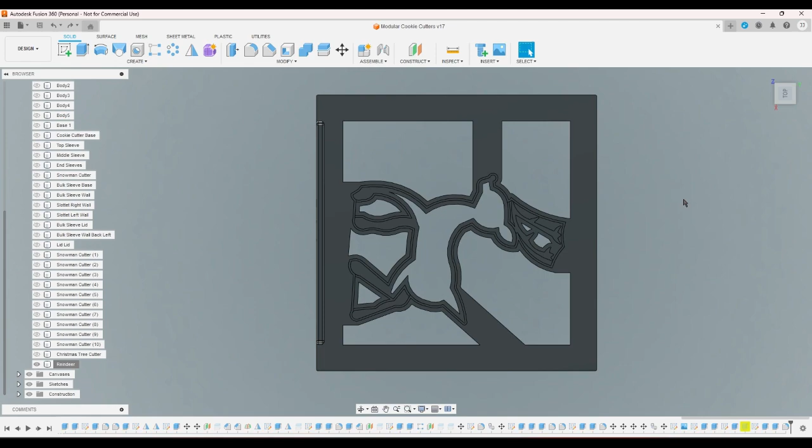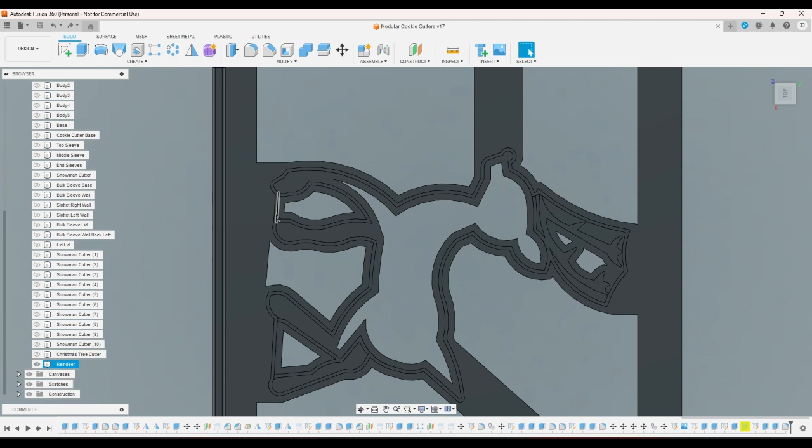Okay, so I showed the reindeer cookie cutter to my sister to make sure she liked it, and she told me to get rid of this right here, she didn't like that. She preferred the shape of the cookie if there were two chunks of legs instead of just one skirt shape. But other than that, it was fine.

So I just quickly made those changes, and now I'm gonna make a Santa cookie cutter. But before that, I'm gonna bring up the cookie cutter base, and I'm gonna do something that should have been done a long time ago.

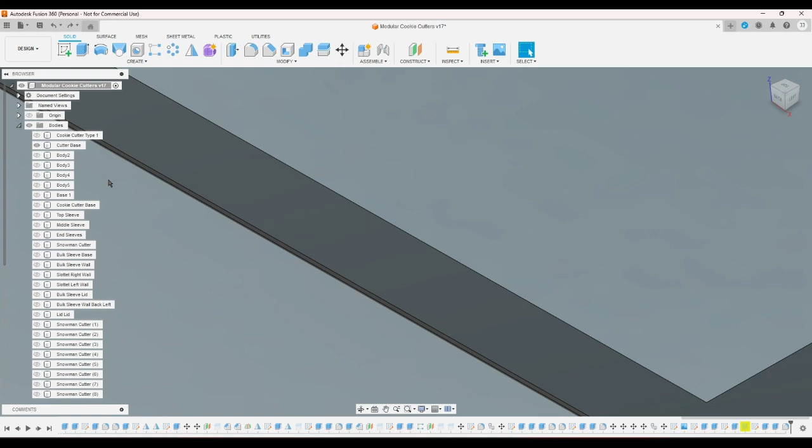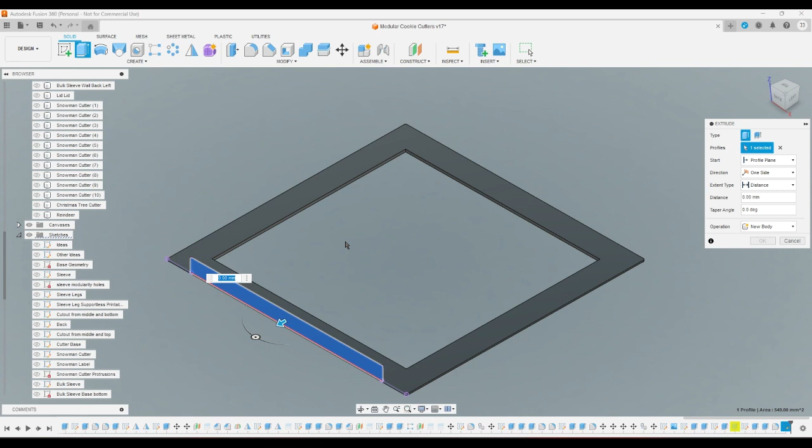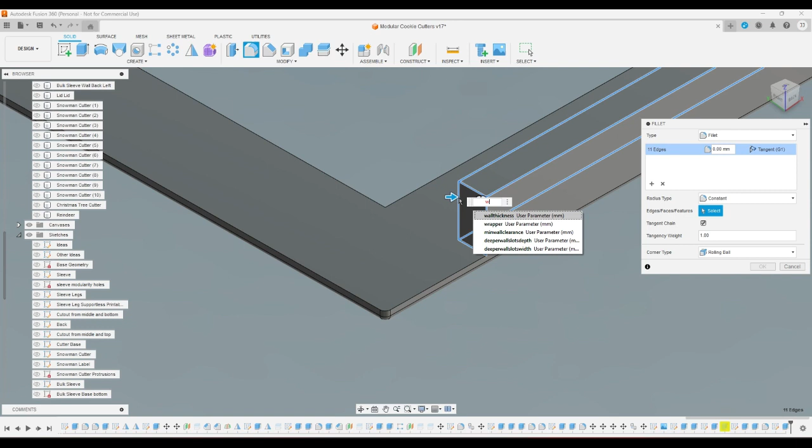Okay, and now I'm gonna bring up the snowman sketches, the snowman label, and I'm gonna project it. And then I'm going to just go ahead, two wall thicknesses, fillet this, and that corner while I'm at it. Alright, there.

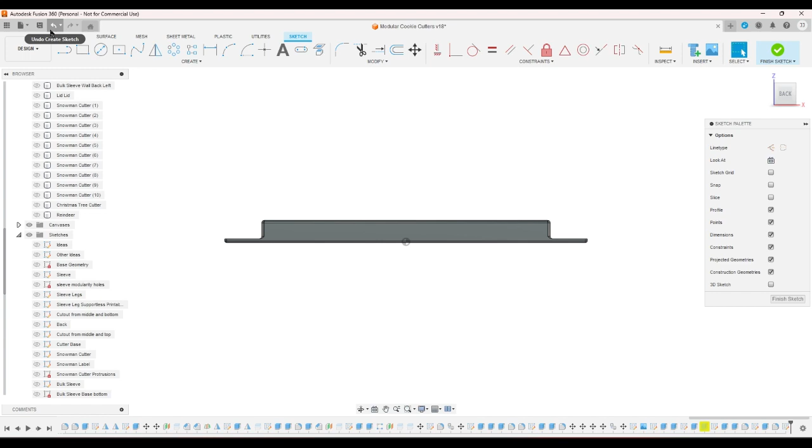Now from now on I can just start a sketch and put the text on it without having to do all that project nonsense from before. Okay.

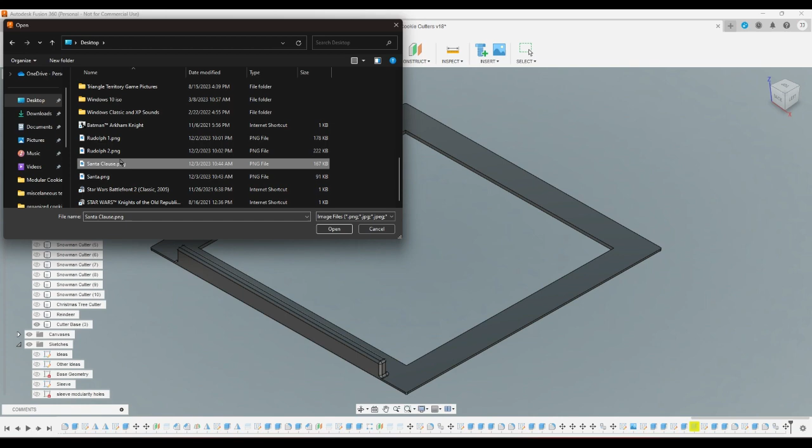So now I'm going to make a copy of this. Get rid of the first one. Bring in a picture. Santa Claus. And it is the Tim Allen Santa Claus because it's very easy to turn into, or it looks very easy to turn into, a cookie cutter. Very easy to trace.

Okay, that's good, I think. What if I rotate this? Can I make it bigger? No, I can't. Alright.

Now I'll start a sketch here and just trace it. About there. Put an arc about there. I don't think I need to do his face, but just in case. I think I'm just gonna do the outline first, and then I'll do details later. Okay.

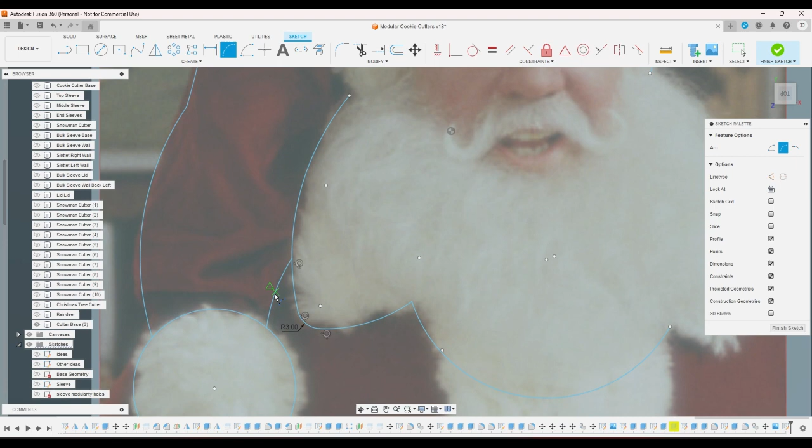I'm gonna have this go, the actual shape of it looks more like it's going this way, but I put it this way just to give it more of a Santa hat shape. So if I make it invisible, that's starting to look like something. This should be a little bit easier than Rudolph was.

Yeah, it looks good. Oh hey, that's not his beard there, that's the collar, isn't it? In fact, that might be his beard there. Huh. And if that were his beard, then that would make more sense to put that there. Yeah, you know what, that might be his collar right there, the collar on his suit.

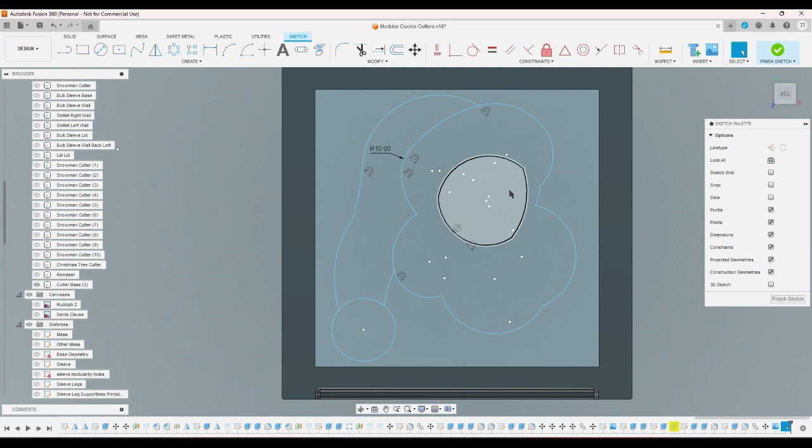It is not easy to... that doesn't look good at all, does it? Because that is what is visible, and that looks like a lady with big hair. It's because the hat and the beard blend in together.

So if I took from here to here, and then looks like the hat goes more or less like that. How's that look? Now it looks like a lady who's wearing a hat.

How would I solve that? I think I need to do a better job at getting the outline of the hat. Okay, now how does that look? It's a better hat.

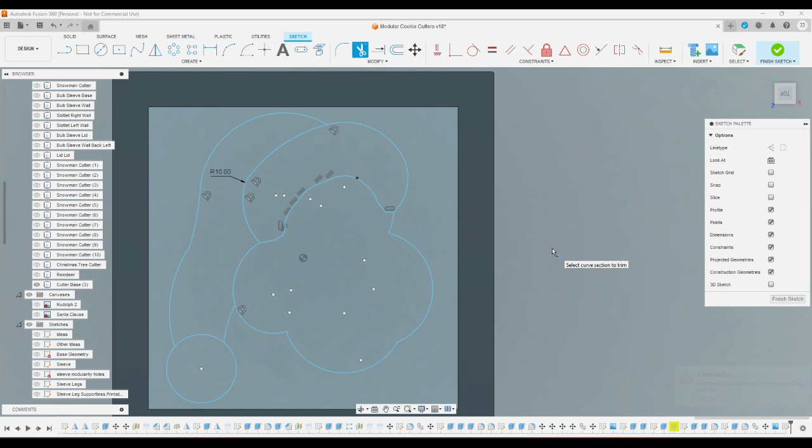Also, I noticed a lot of parallel constraints here. Why is that? I don't know, look, this one's vertical. I think what I need to do is separate the hat from the rest of him. So if I do that, what does that do?

If I extend this to be a full circle and this to be there, and then I have this, and then I shrink the hat, if I just ignore some of this white stuff here, like say I put it maybe here, that's the beard, and then the hat can come in like this.

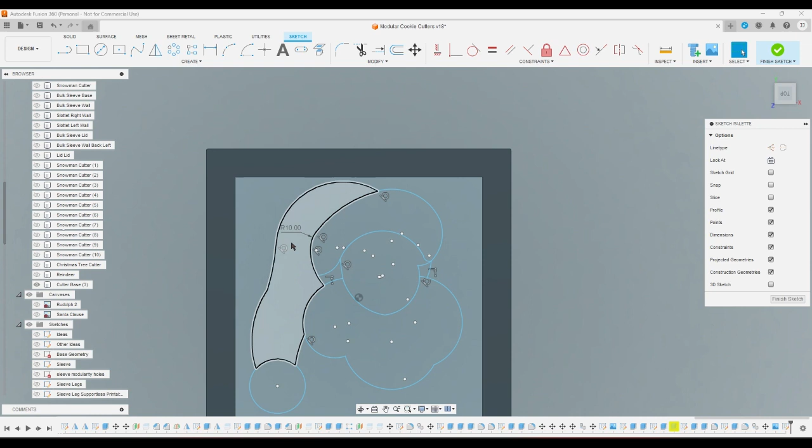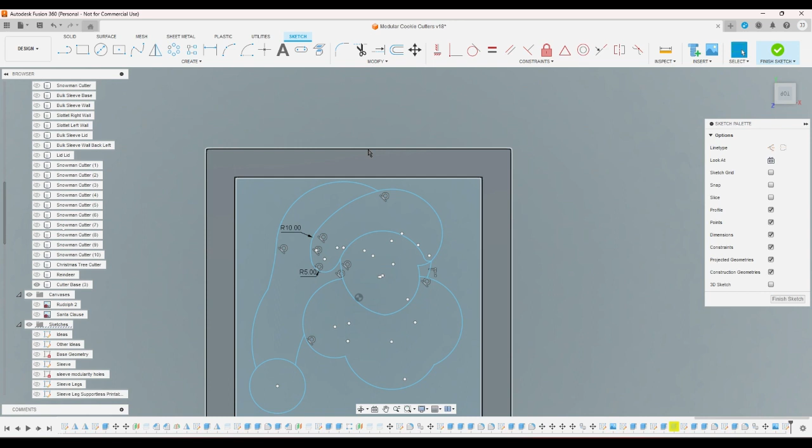Alright, so then that would be the hat. I could trim this. Okay, okay, the hat comes out too far. So whoops, I'm gonna have to do my best to, I don't know, estimate something.

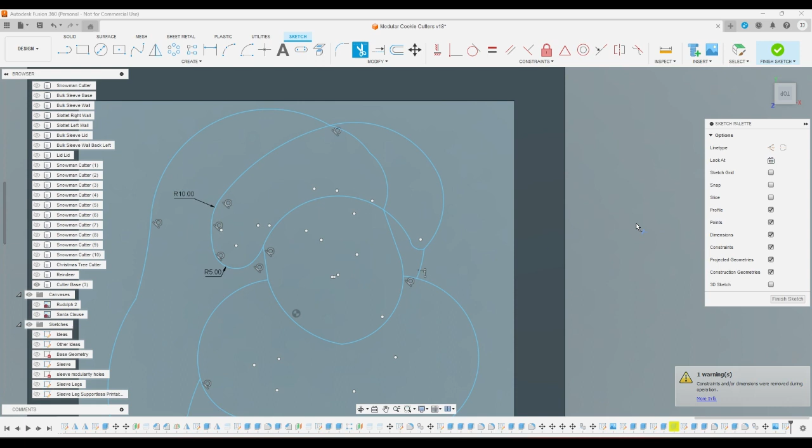Let me just get rid of all of the hat. Okay, that white part of the hat is really tough. Don't include that.

So then if I have a piece here and a piece here, and then I have a piece here that just is a little bit poofy, and then I have this, then another piece that's just a little bit poofy, and this. But now the problem is it's too tall and it looks like a different kind of hat.

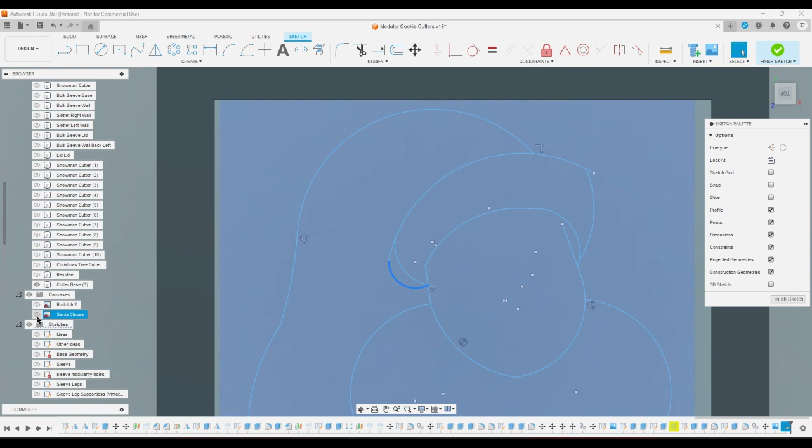So that's the problem - in this picture the hat kind of just goes all the way around his face, but then it ends up making him not look right. So if I did this, follow the hat again, but not all the way, just break off here.

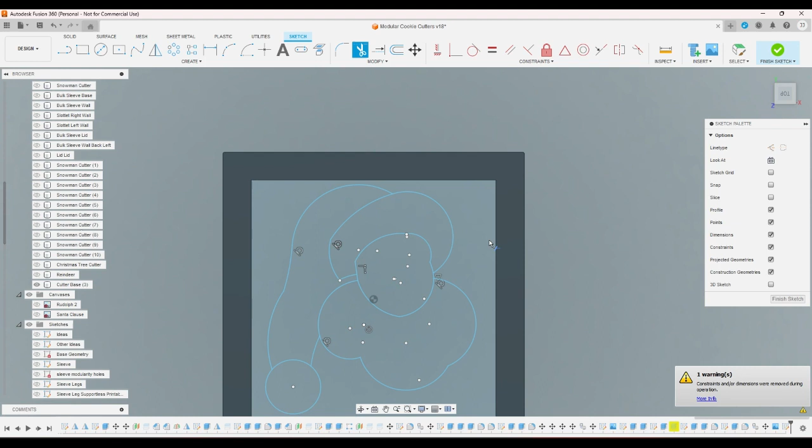Whoops, wrong. Okay, now what does that look like? If I trim this, and bring this in...

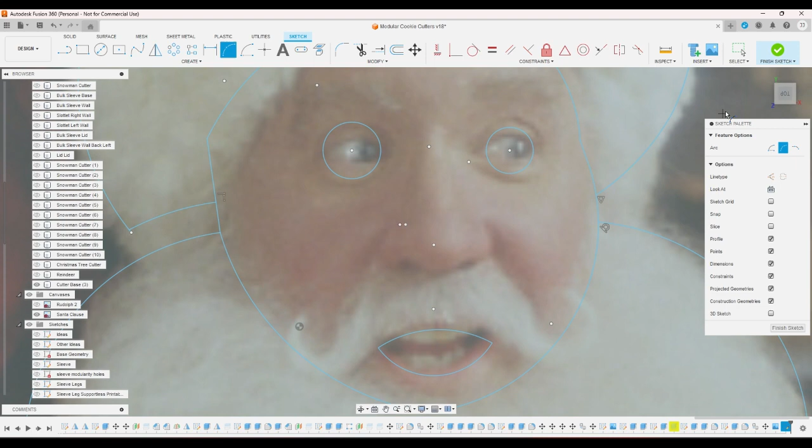I need to have eyes. Let me see something real quick. If I just put two little eyes and a mouth, how's that look?

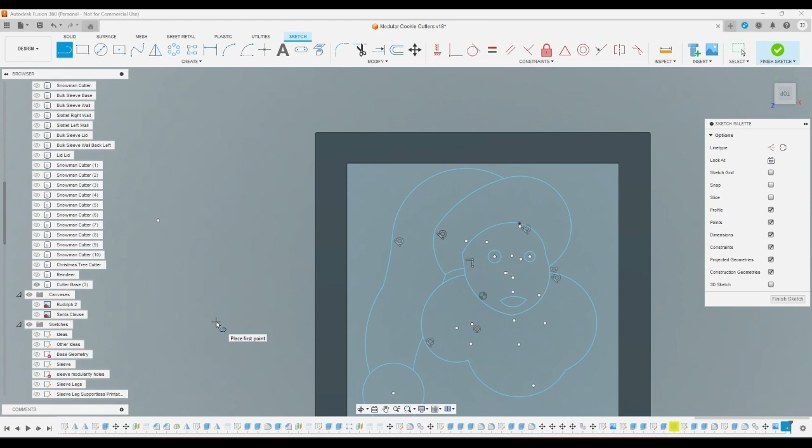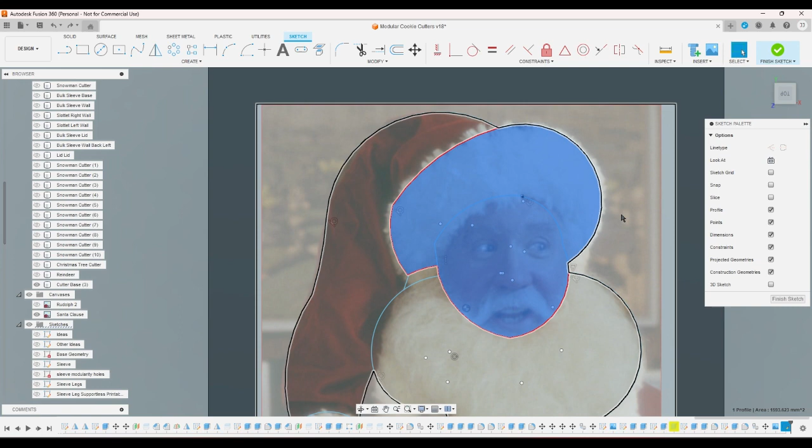It's the face that's ruining it. It's the shape of the face, I think. See, that's better if it's just that.

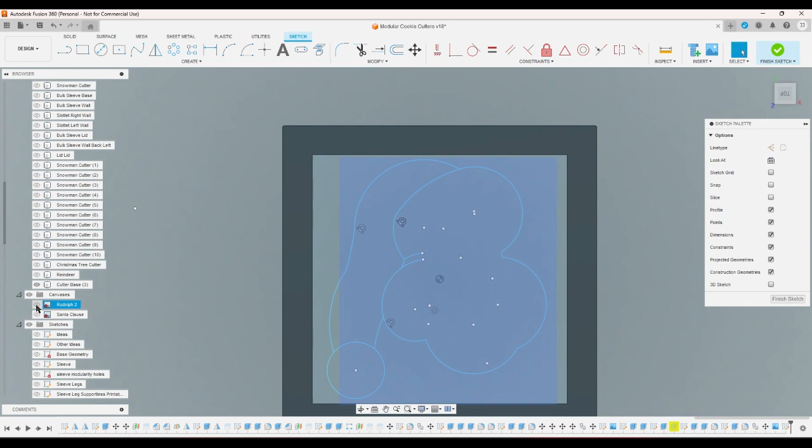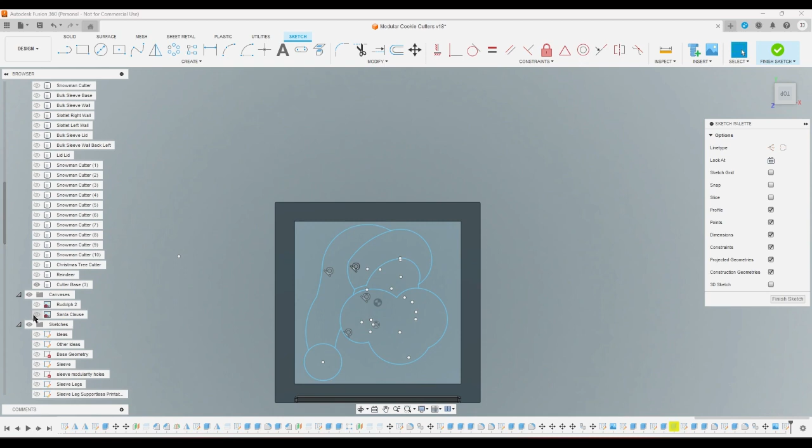Okay, so what if instead of having the beard be the same, the beard is also like poofy? That's better. That looks like a beard now.

And then if I add the mouth through the beard, yeah, that looks like a Santa Claus.

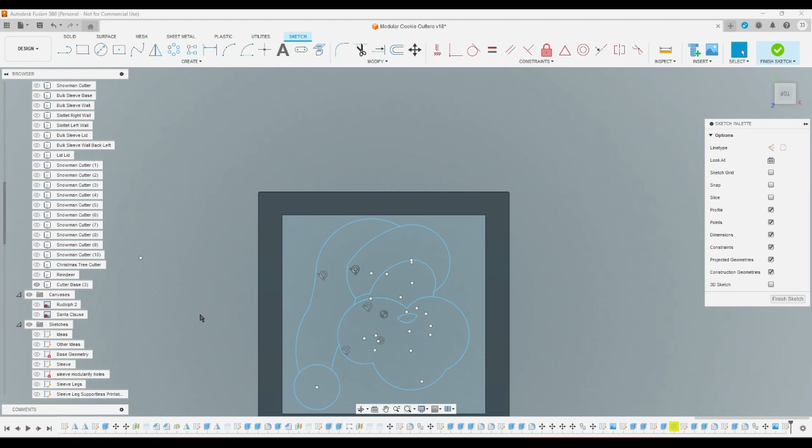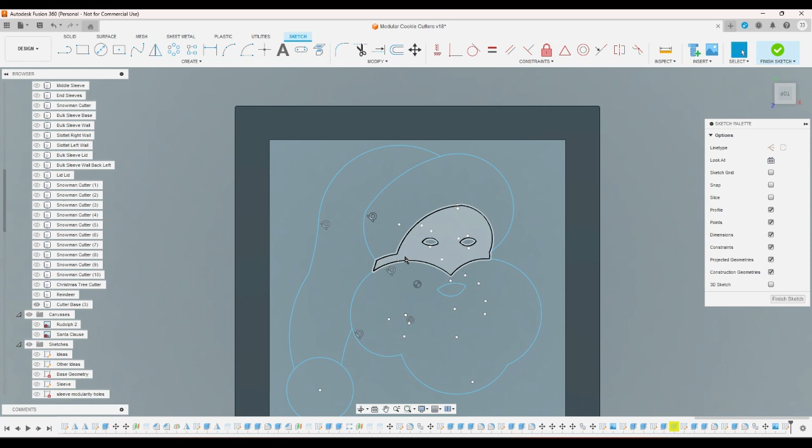Okay, so now I'll add his eyes, because apparently it needs to have eyeballs in order to not look wrong. And then, oh goodness, oh goodness. I'm not good at drawing things, so like...

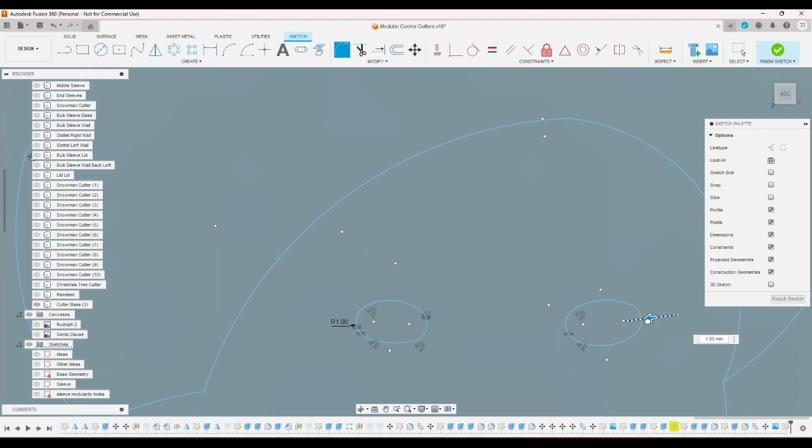I think that'll work, I think that'll work. Okay, this and this.

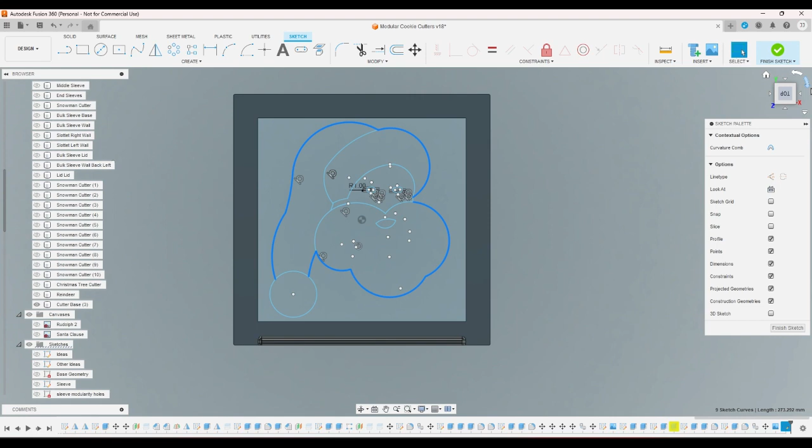Could not offset curves. Okay.

Joel? Yeah? I forgot to buy Fabulosa. Could you run to the store and get Fabulosa for me? I'm gonna clean the walls. Not right now.

Okay, okay. Cutter thickness.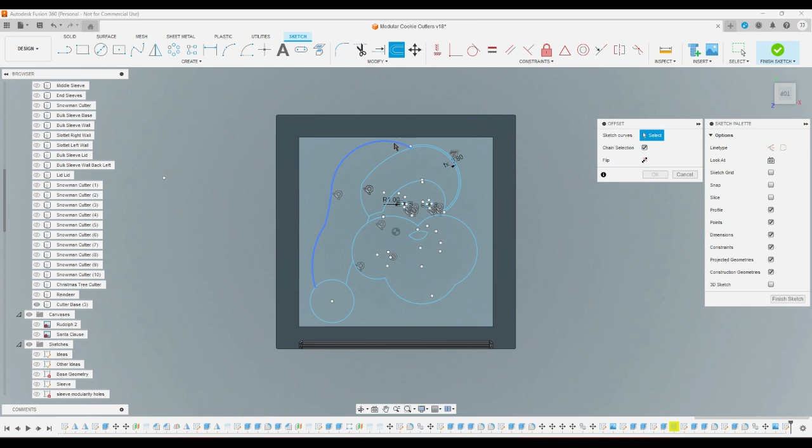Trim these, which is gonna suck because... never mind, okay. Whoops, what?

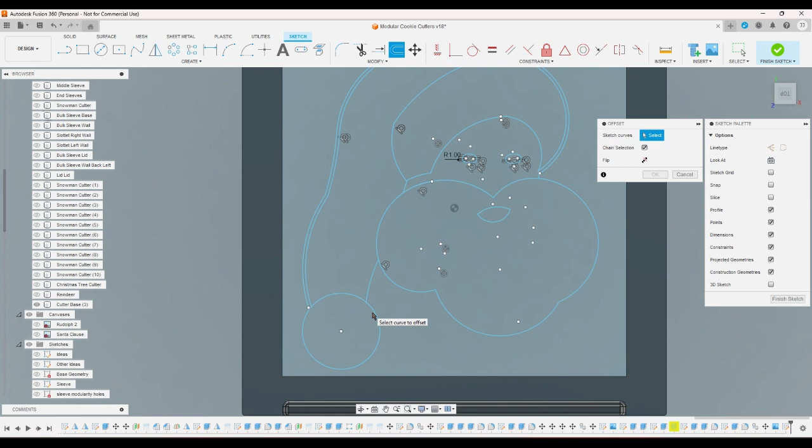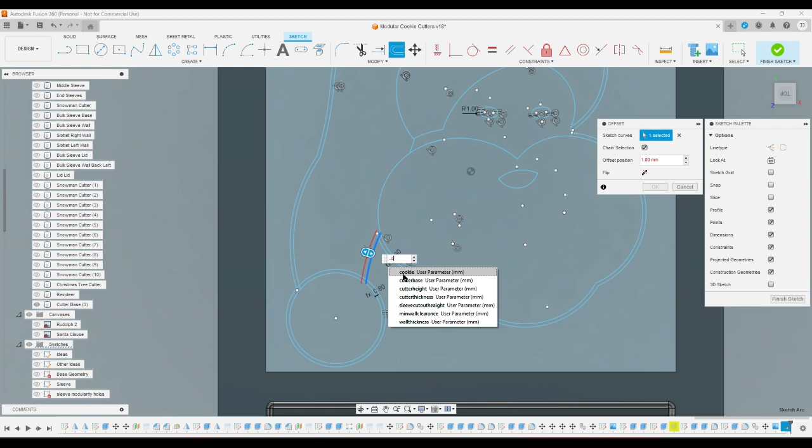Okay, offset this as well. This has to be negative. And then... okay. Now trim here. What? No, trim, not extend.

Alright. Constraints and or dimensions were removed. I understand that.

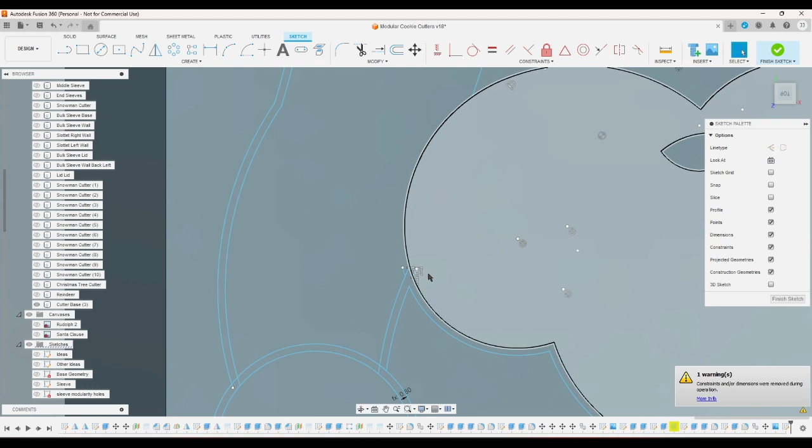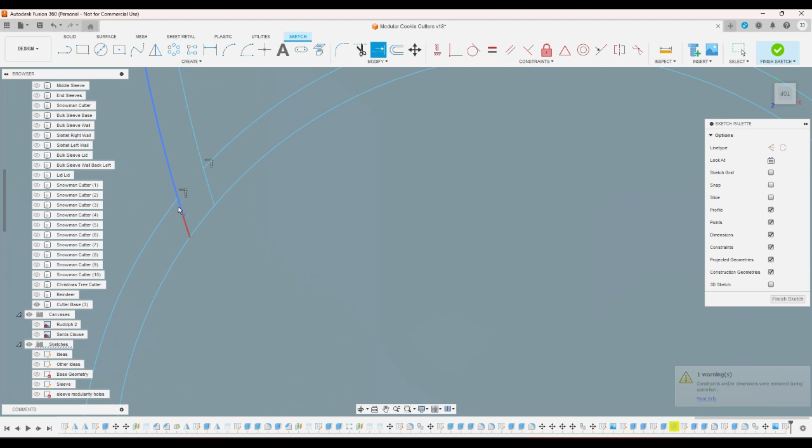Alright, and then if I... okay, and then I guess I might as well also get these two bits. Oops, I keep accidentally clicking on extend. Alright, that's good.

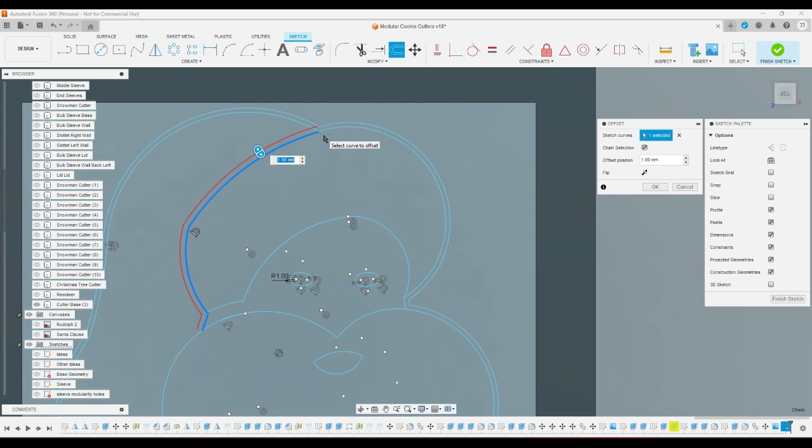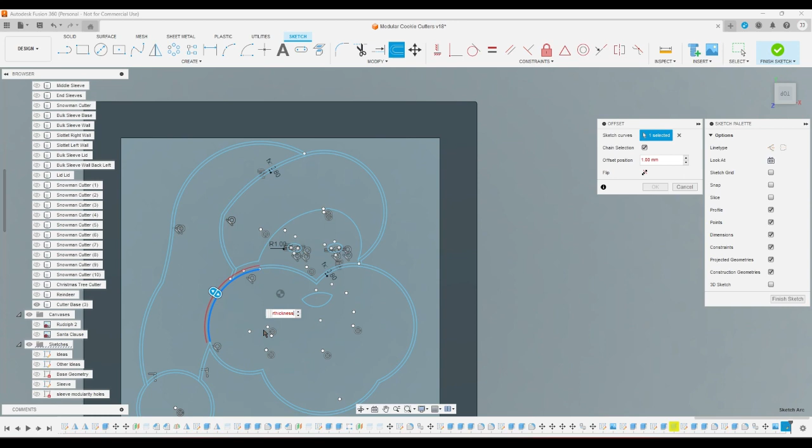Now for the inside. Okay, now this one has to extend.

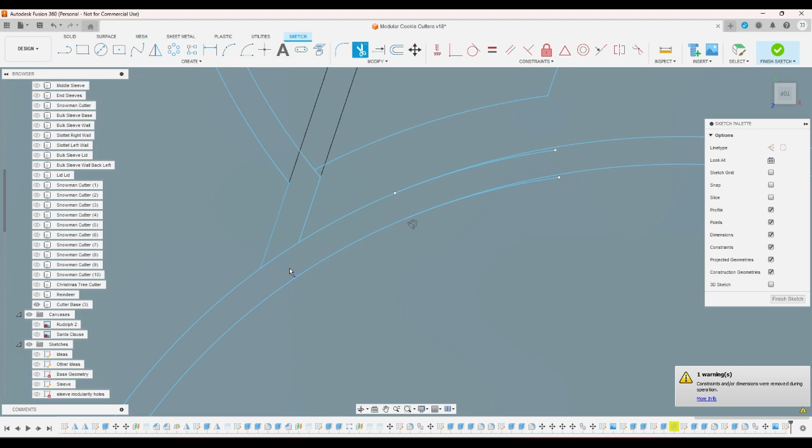And then I've got to trim this - no, don't trim that. Trim this. Why did I trim the whole thing? Okay, trim this first and then this. Okay, there we go. And then this.

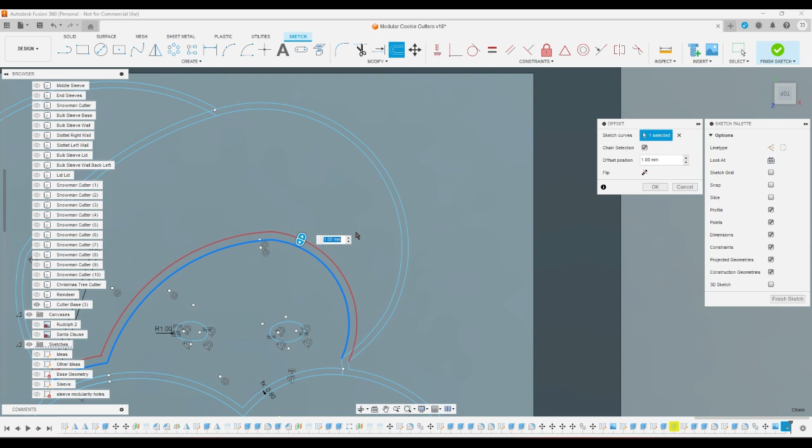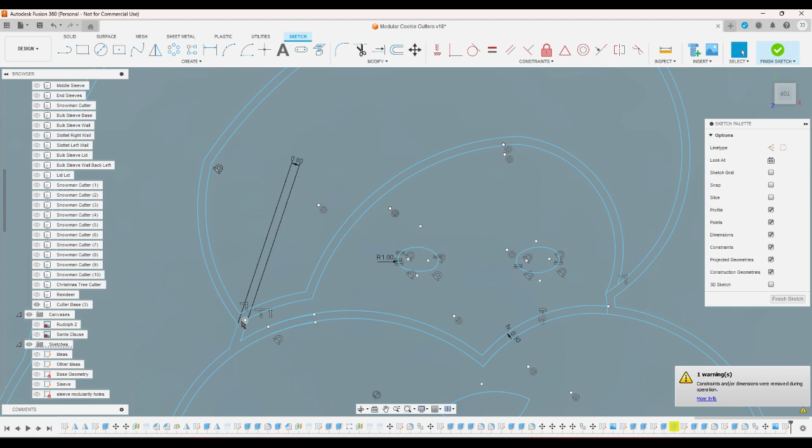Alright. Now I can just offset this one last bit. Trim it up. Extend it. Trim it. Alright. Okay, cool.

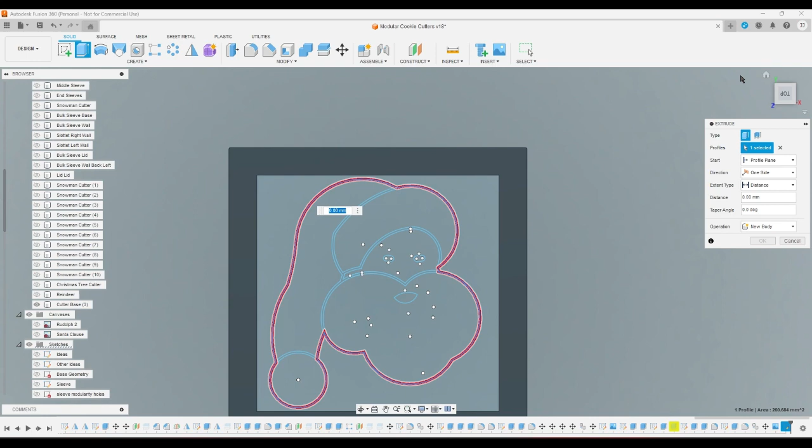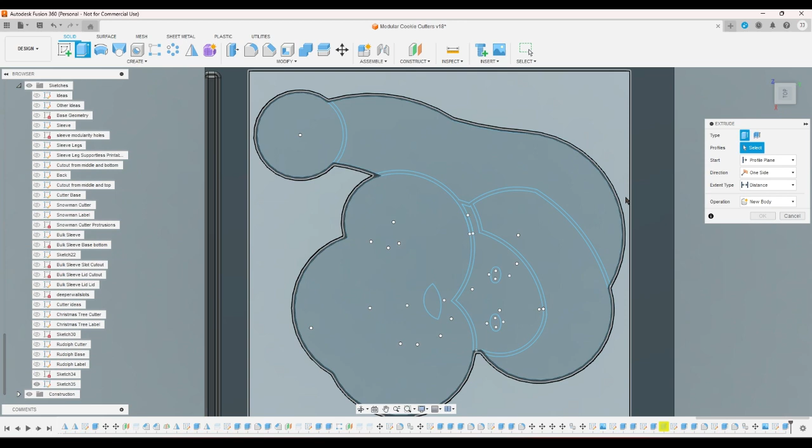That's going to be the cutter height. Bring back the sketch. And this, and this, this. These are going to be the cutter height minus the detail depth, which I actually changed to 2.

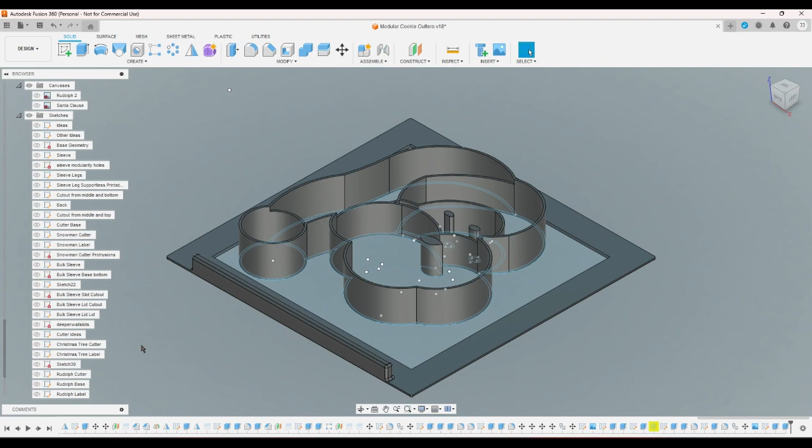Okay, rename this to Santa Cutter.

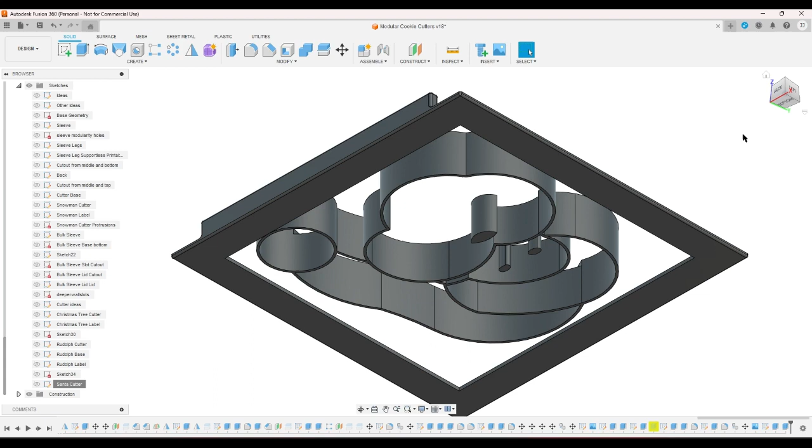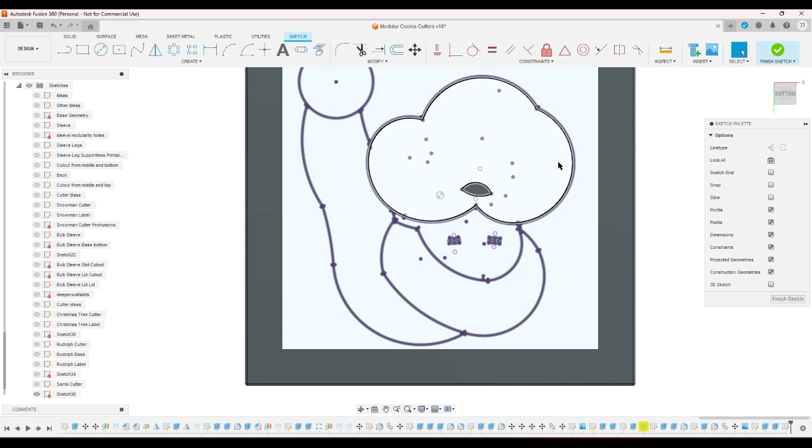Alright, project this whole - no, project this whole bottom here. Okay, wall thickness.

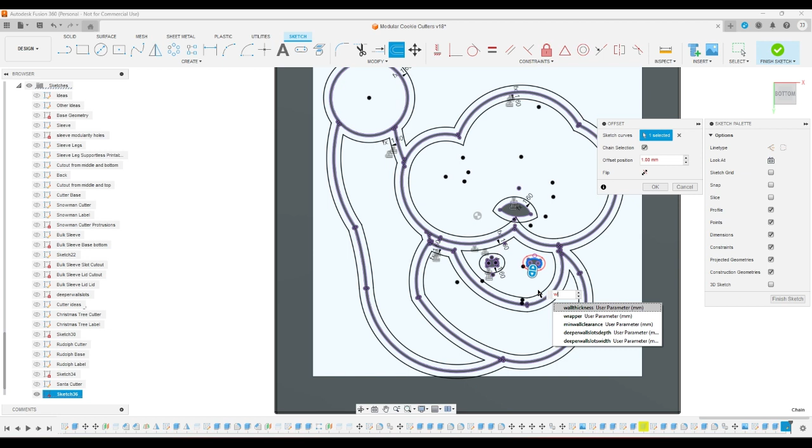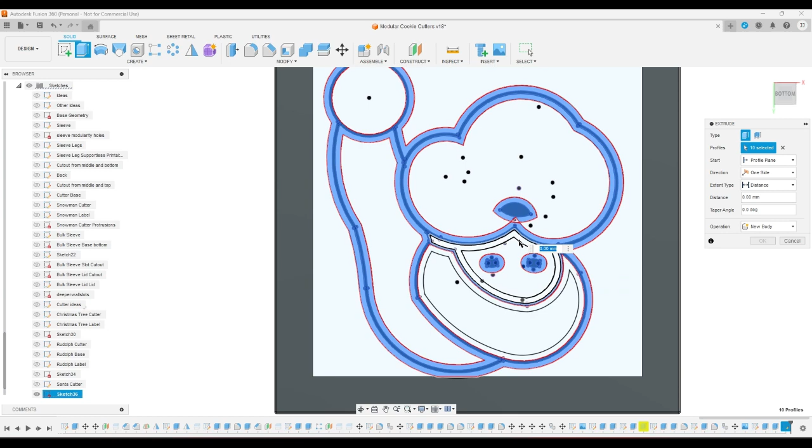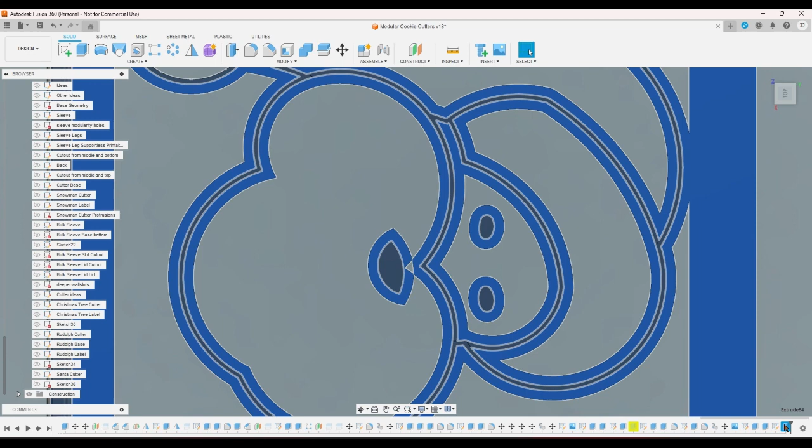Okay, and then it's connected at these points. I'm gonna add another connection there. What in the world? Okay.

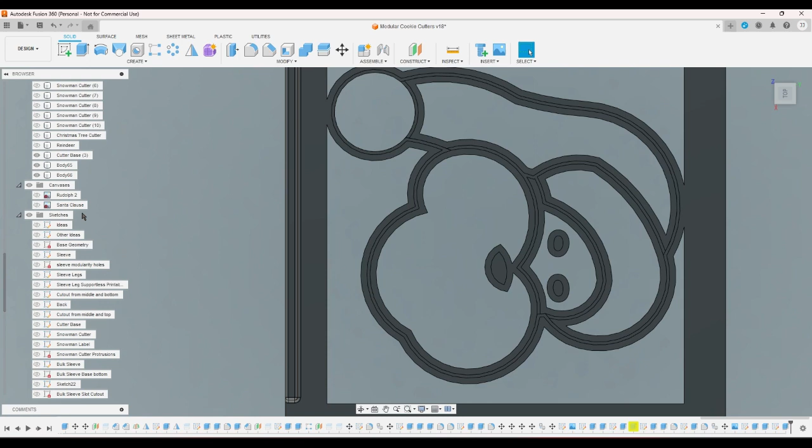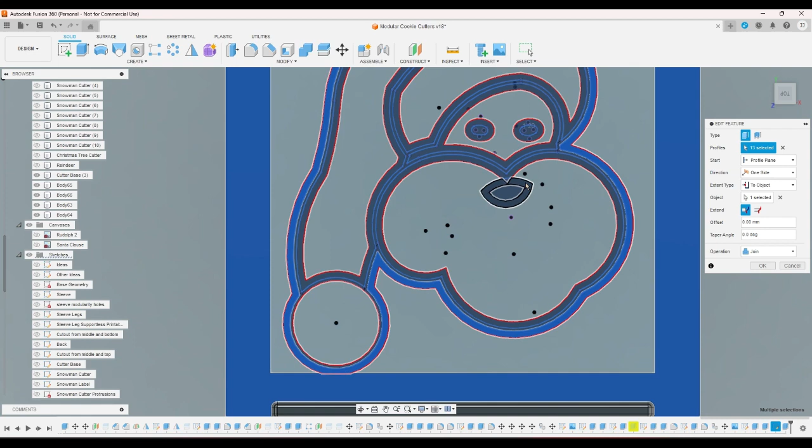So now I need to add a way to connect the eyeballs, and also, do I want the eyes? Do I even want this? Maybe I don't want the mouth either. I think it's better without the mouth and eyes.

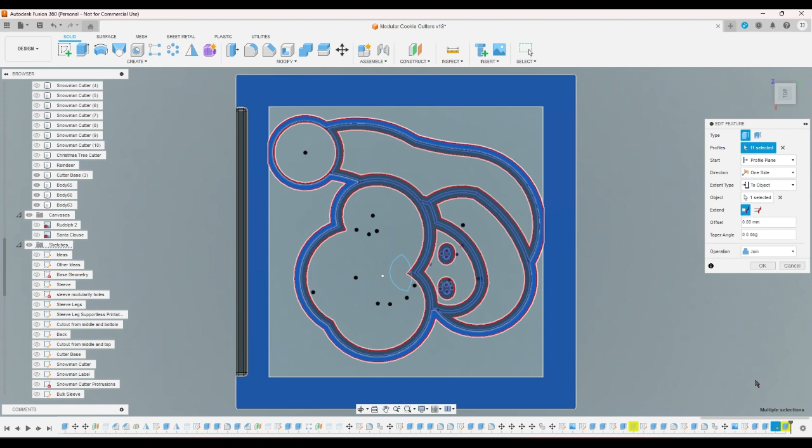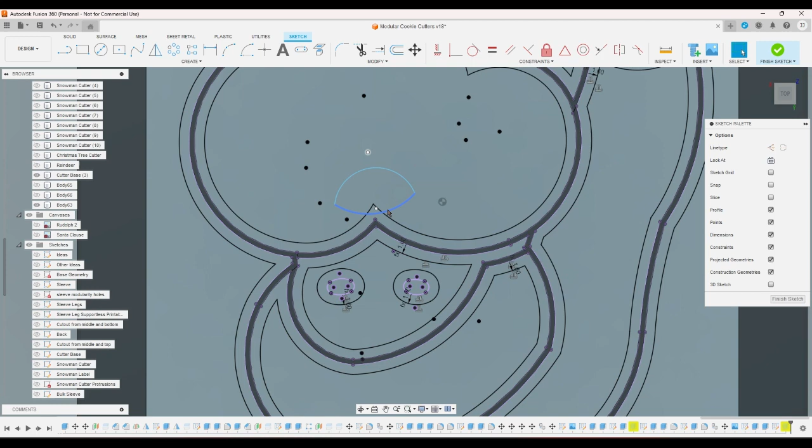What's the warning here? The body reference is lost. Try edit. Oh, because... no, I just got rid of the eyes. Oh, it's because... okay, well, I'm just gonna hit Control Z until... okay.

Okay cool, yeah I'll just keep that as is, and then I'll go back into here and just take... it's connected here and here. I think I want to put it here. I might want to put it here.

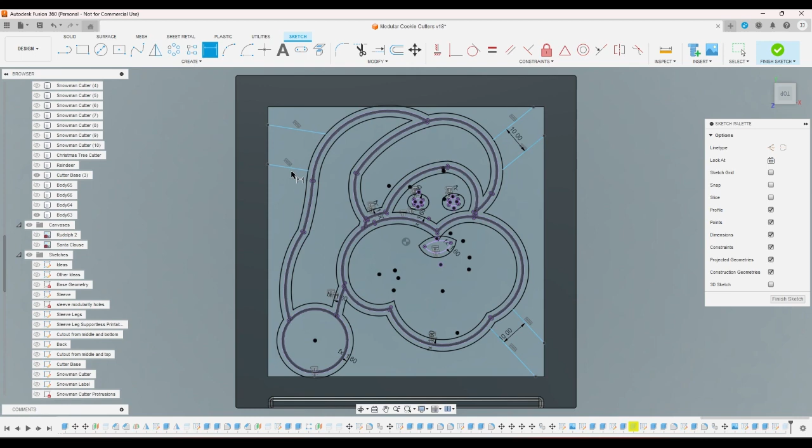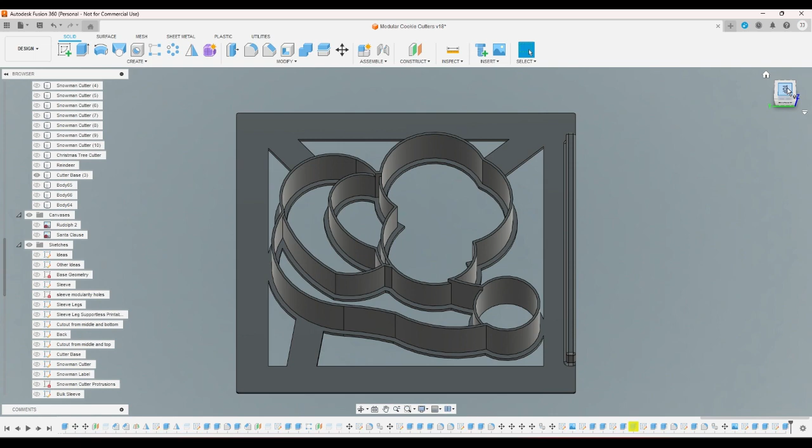And then add these parts. Okay, and that, I believe, is a good enough recognizable Santa Claus. It's got three big poofy shapes for the beard, which is pretty good.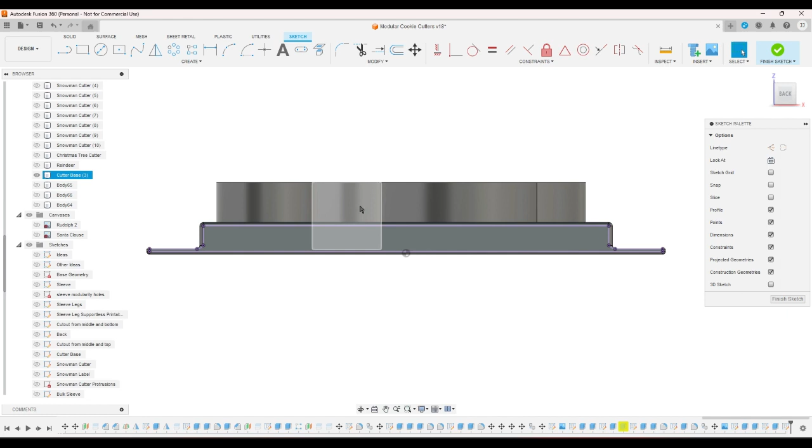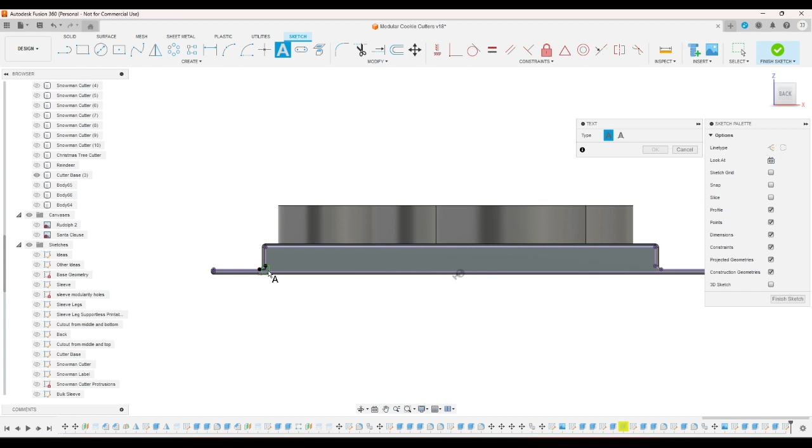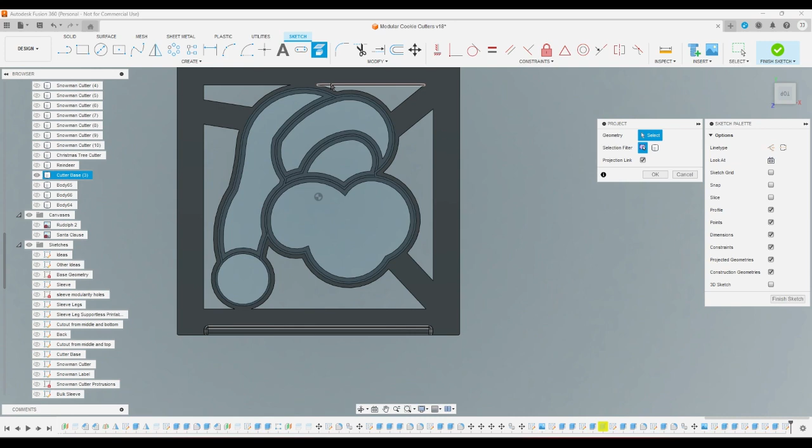And then the shape of the cookie, right, would be - if I were to project just the face here, and then got rid of the thing, this is what the cookie would be shaped like. That is a Santa Claus. That shape is definitely a Santa Claus cookie cutter shape. So that's good.

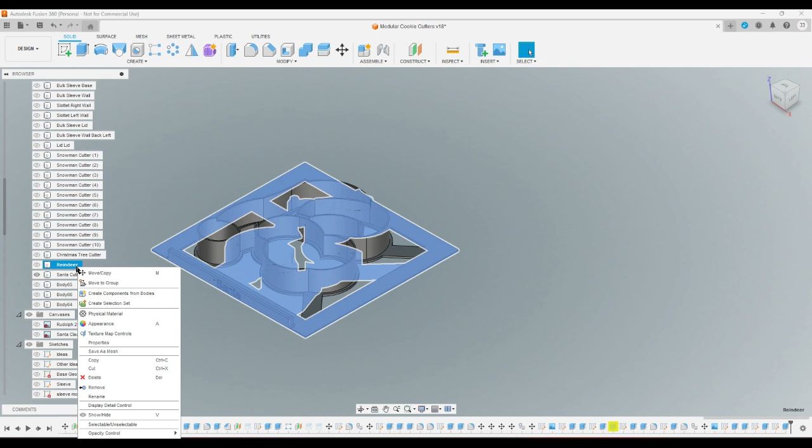Alright, rename this to Santa Cutter, because I believe I was naming these cutters, right? Yeah - Snowman Cutter, Christmas Tree Cutter. Rename the reindeer to Reindeer Cutter, but I won't bother changing it or resaving it.

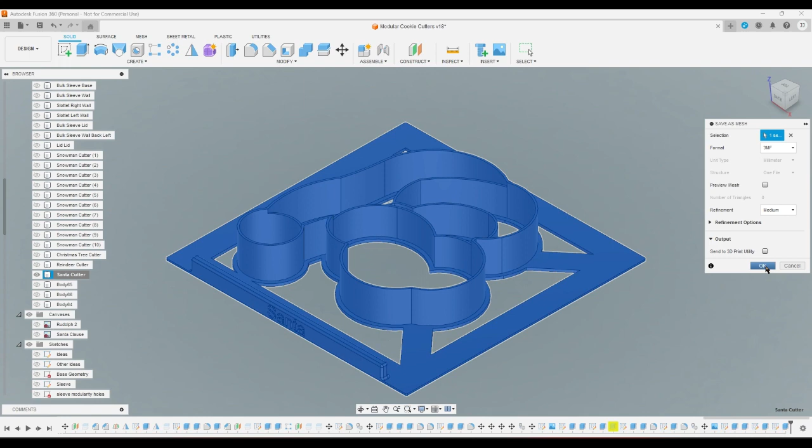Now I have to find all of the... okay, save here in that file. Okay, and now I'll go ahead and print this out, and also the reindeer.

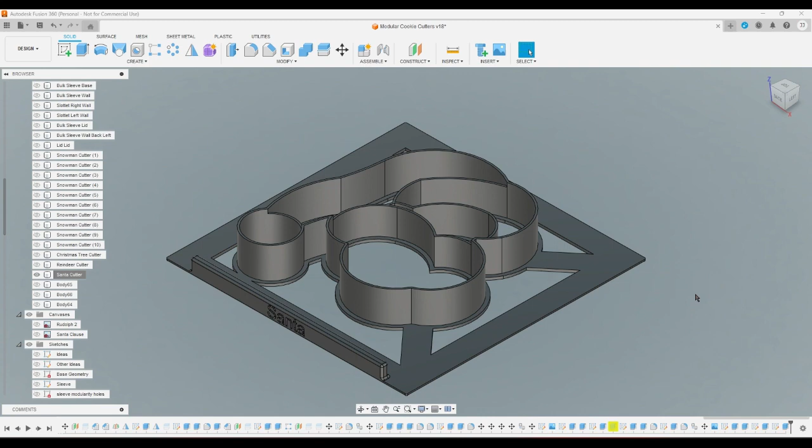And I think the next one I will do will be... let's see, I've got Santa, I've got a Christmas tree, I've got reindeer. I think I'll do a Christmas ornament next. Yeah.